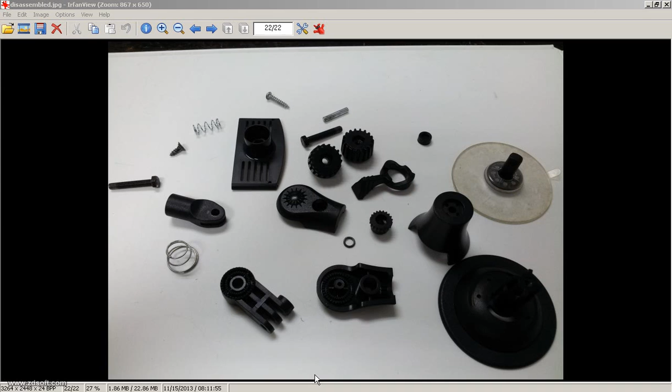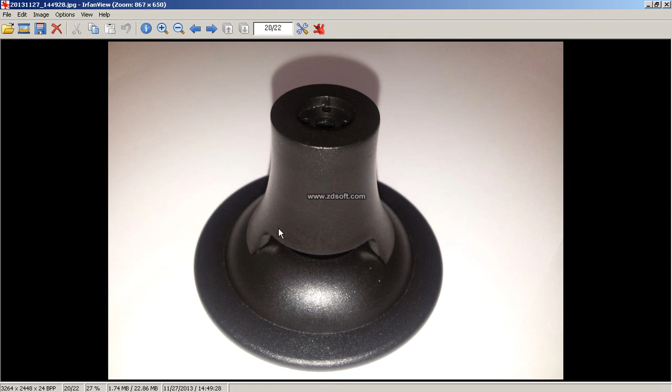Alhamdulillah, in this video we will continue our SolidWorks project on this glass suction cup mount holder. I would like to show you another component, which we can call a vertical casing. This vertical casing is mounted on this support structure here, as shown in this image. At the bottom we have our vertical support, and the upper part is our casing, the vertical casing.

In this video I would like to show you how I did this vertical casing in SolidWorks. So this is another view here, this is our vertical casing. This is another view to show you the bottom portion of our vertical casing.

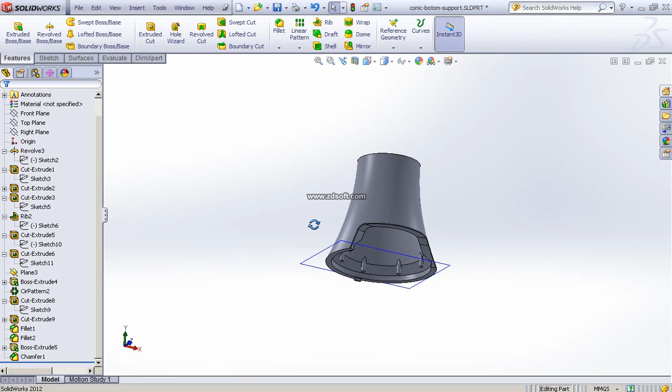Alright, okay, so in SolidWorks, for us to do this component, let me show you. So this is our vertical casing, which I have done. As you can see, the way I did this component, we have our features tab here, our feature manager. Let me drag until at the end, to our starting point.

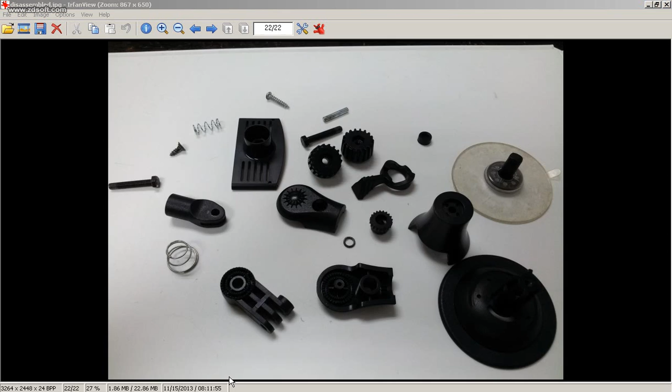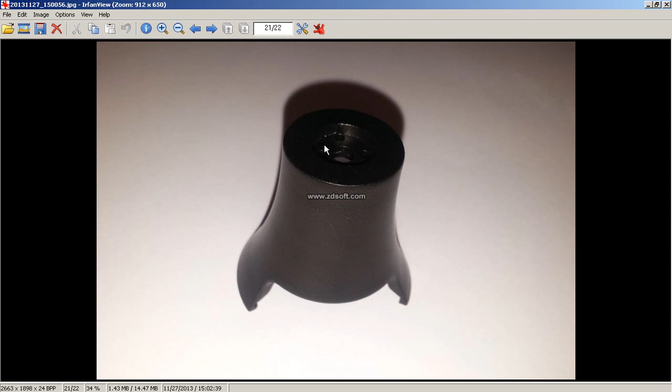Firstly, what I did is some revolve, as long as we know the cross section, as shown in this image. The cross section of this geometry - we have a cone, is a curvature, to form a kind of cylinder here, but we have a curvature. So I already measured the dimensions of the cross section: the diameter, the length, and the curvature.

As shown in this sketch, if I go to normal view, we have our cross section. The radius at the top part is radius 11, bottom diameter is about 39, okay, 39, and we have the radius 19.5.

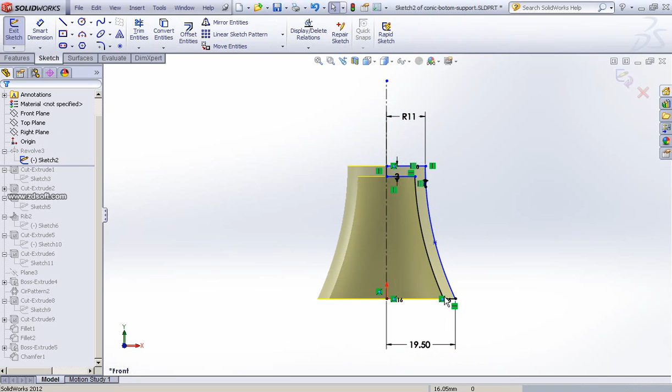I didn't use any shell command. After we have a solid, you can also use shell as long as you know the thickness, but I just revolve by making an offset of the curve, and the distance of this thickness is 3. Then I do some revolve into the center line.

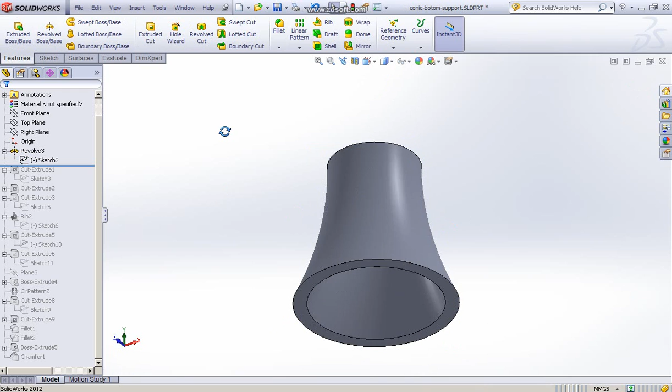So we have our basic shape for our casing. The next thing I do is cut extrude, since we have a cutout here for a certain depth. The sketch is sketch 3, and the depth of our extrude, if we zoom in, is about 2 millimeters.

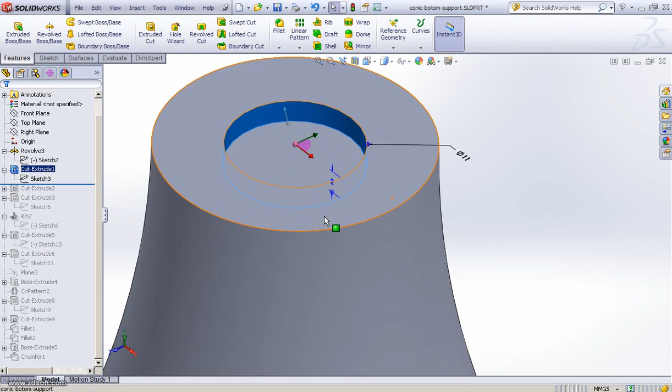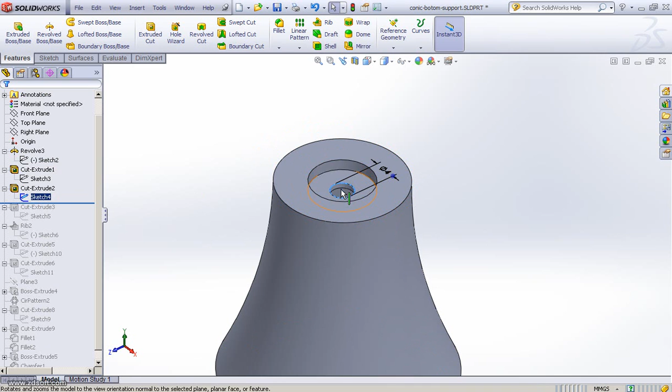Since in our component here we have a depth about 2 millimeters, then the next step is I use another cut extrude to form a hole here, diameter is 4, and a cut through hole. So we have a cut through hole, diameter 4.

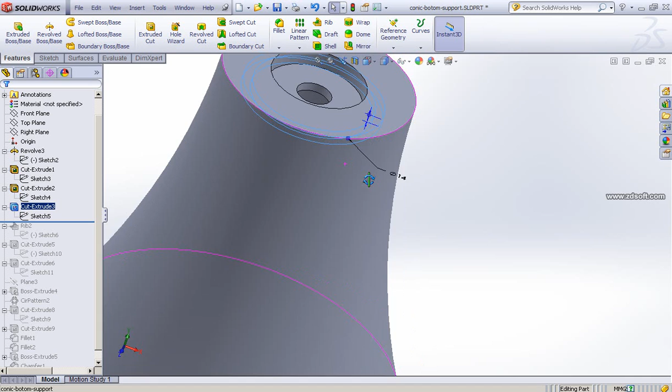Then I do another cut extrude. This cut extrude is actually in the inner part of it. So if you look from the bottom view, we have some cutout, some circle with an offset. I made a cutout.

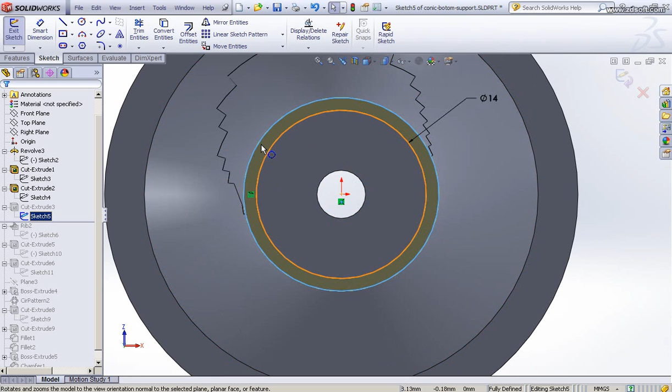So this is the geometry of this component. The sketch of this cutout has diameter 14, and if you go to the normal view, we have diameter 14, and our cross section is diameter 14, and with a certain thickness we have a cutout. We find some kind of a groove inside, the inner part of this casing.

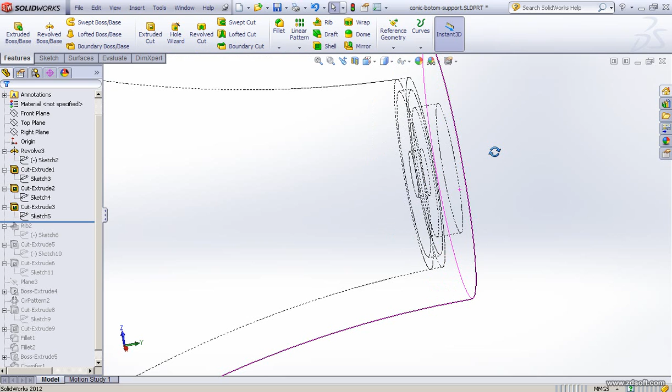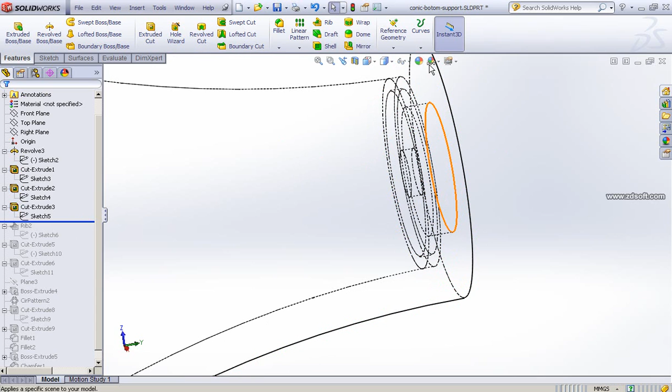To better view what the cut extrude does, let me make it into hidden line. So before cut extrude, we have a solid inside surface, we have a flat. Then after cut extrude, we have some cutout from here, some circular cutout, based on the diameter 14. Let me go back to shading mode, to shaded mode.

So then the next step is rib. The rib will be at that part, in this area. So the idea before this, we make a cutout for us to do some rib here. So we have a rib. The rib sketch is made with a single line here, with some trim.

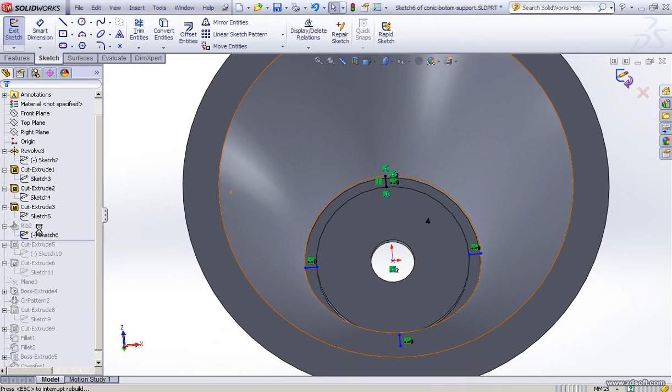We have 4 lines here, so we do a rib with a certain thickness. The thickness of the rib is 0.5. Make sure the direction of the rib is to the bottom if you look from this view.

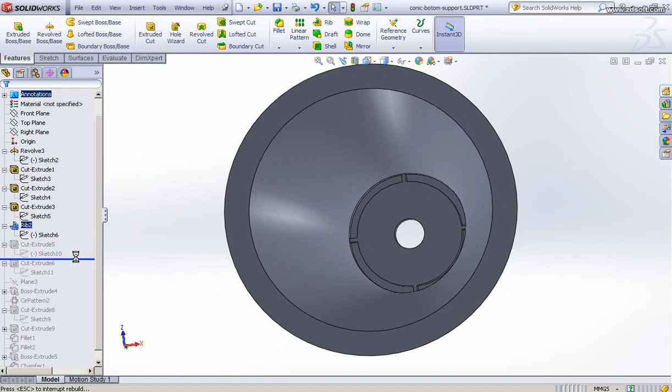Then make another cut extrude. If you look from this sketch, at this area, before we have the cut extrude, if you look from the bottom part, we have a flat surface here. When I do cut extrude, it's to make a cutout version, so we have a step here, another step, a cutout with a certain depth.

I copy the edges here as a convert to entities, as edges. Then after that, what I did is make a cut extrude with a height of 2 in that direction. So we have a kind of step here.

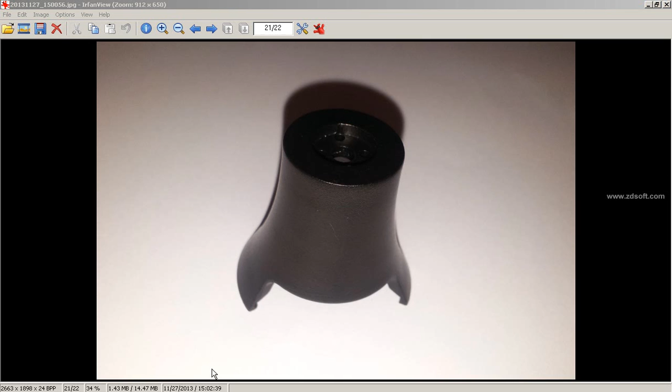We have kind of a step here, since in this picture, if you look at this, not this one, we have kind of a step here, with a distance of 2. Okay, then...

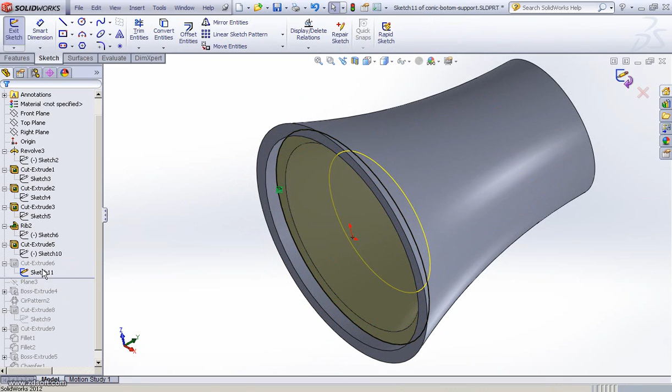The next step is I make another cut extrude. The idea of this cut extrude is to make a kind of chamfer here by this sketch. The sketch is I copy the edge of this surface by convert to entities, but when I do, we have another option when you do cut extrude. If you look at the cut extrude settings here, we have a parameter of 50 degrees.

I copy the edges to get a profile by using convert to entities at this plane. At this plane I made a cut extrude, but not using through all, using blind by a certain distance, 5. We have an option here: if I didn't click any option, we have a straight cut extrude, but if I put it 50 degrees, the direction of our cut extrude will be tapered by 50 degrees measured from our vertical axis. So we have 50 degrees.

Make sure that you click on draft and set it on. You have an option, draft outward. If you put draft outward, it will be increasing, bigger. Make sure it's not draft outward, so it will be decreasing, tapered inside, about 50 degrees. That's another way to use cut extrude. I didn't use chamfer; the suitable way is to use cut extrude for this case.

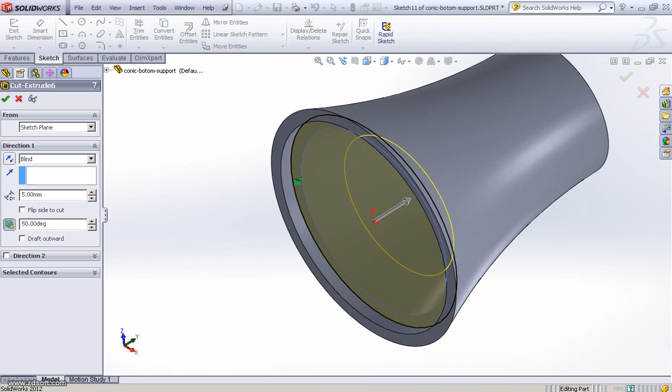Then we have another thing. The idea to make it tapered here for 50 degrees is that when you look at this image, previously we have a step here, then a surface which has been tapered, shown in brown. I measured approximately 50 degrees, so it will be kind of tapered here at 50 degrees.

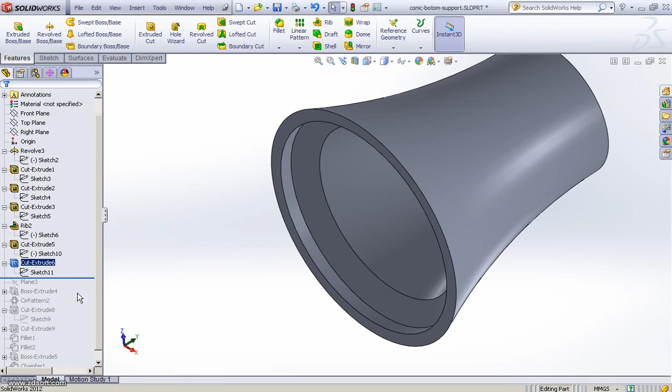Right, then I go to plane. The plane here, I make by using a reference plane. I think you guys know how to set this plane. The plane is referenced from the bottom surface here, and we put a certain distance.

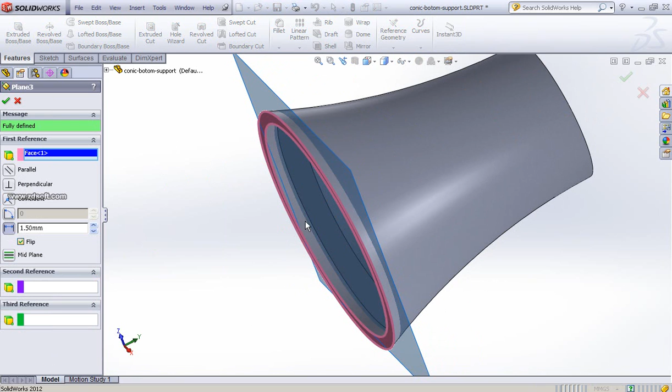If you look at the setting of the plane: the face one, the bottom one, is our bottom surface, so we have a distance of 1.5 here. Make sure the flip direction is toward that direction. Our reference is this bottom surface by using a reference plane, with 1.5 millimeters in this direction. Make sure I click flip, so we make a new plane there.

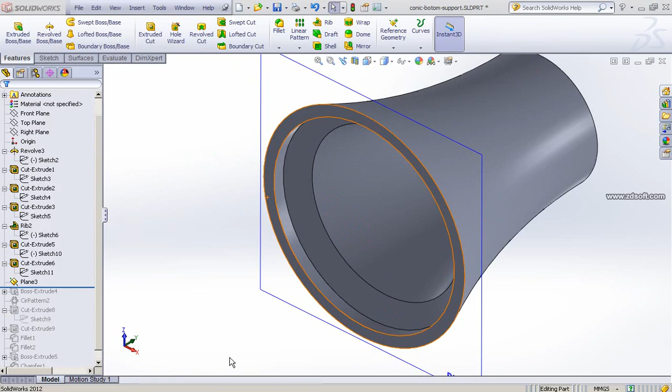Plane 3, so the plane is for me to do this. If you look at this picture, we have a kind of what we call a cylinder key, a cylinder which has been merged from the surface. We have a cylinder here starting at the top face of this tiny cylinder, which is where we put our plane. Then we do a circular pattern, then extrude directed to this conic casing. So that's why we build this plane.

After we have this plane, then we make a boss extrude.

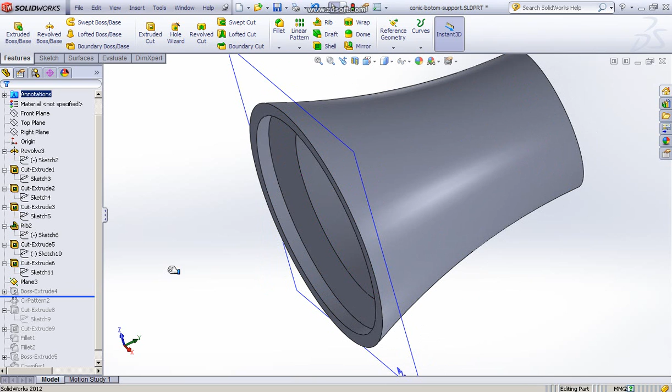Initially I have one cylinder here. The sketch plane will be the cylinder, the circle here. This circle is on plane 3, and on this plane the diameter is 1.5. Then we extrude toward the surface.

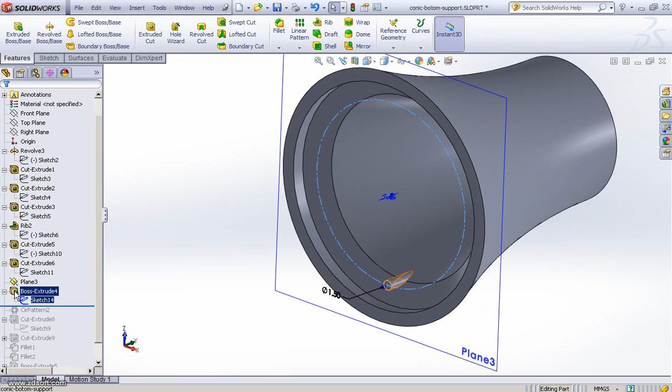So when I do the settings for extrude up to the surface, you select the inner surface, so it will be extrude to the surface.

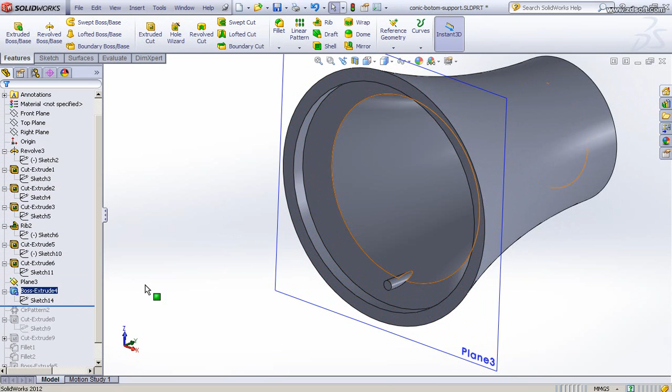Then after we do this boss extrude, we make a circular pattern, using the inner or outer surface of this cylinder.

So our circular pattern setting total is 7. The features to pattern is our original, this tiny cylinder here, our boss extrude 4, and our edges here.

Edges here, you can use these edges or you can use surface. We have the edges, this edge, and 7 is the number of our pattern, and make sure you check equal spacing, so it will equal space around this circular pattern.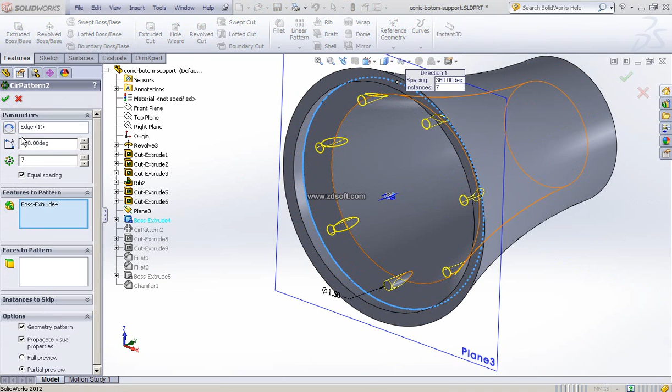So then we have this, we have 7 of it. We have 7 cylinders.

All right, so the next move is that we will make a cutout here. If you look from this image, we have a cutout. Actually this cutout, if you look at this component in detail, is not a straight section. It's kind of a circular cutout with a certain radius, a big radius of circle.

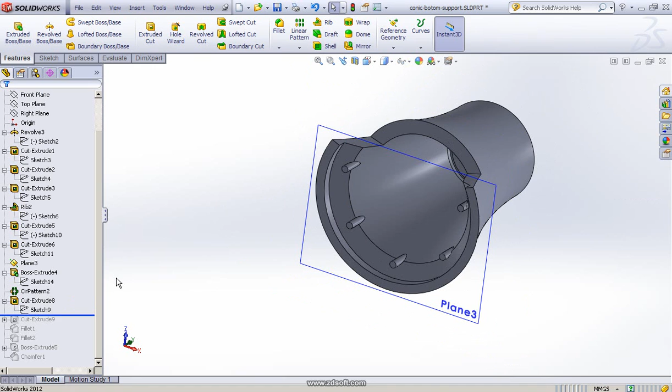Then we make a cut extrude here to cut out this part. So what I did is, if I zoom out a little bit, after that I do a cut extrude. If you look on the sketch, if I edit the sketch, we have a sketch there.

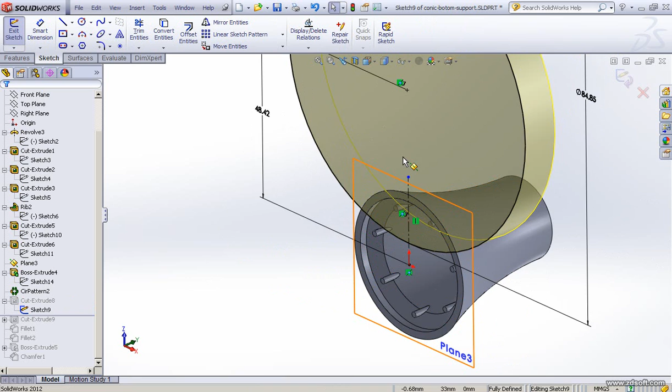The plane where I did this circle is on the bottom surface. I make a sketch plane there. The radius is approximately 48.42, and the height is roughly set to get the basic shape for cutting this portion, this area to be cut out.

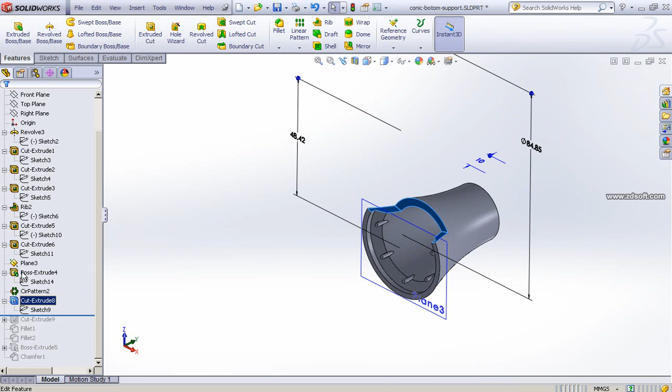So we don't use a sketch for the distance; the cut extrude setting we don't use with a certain distance, it's about 10 millimeter, the thickness of our cut extrude direction, because the distance here of the height of this cutout is about 10 millimeter.

So this casing will be cut out to get this kind of shape.

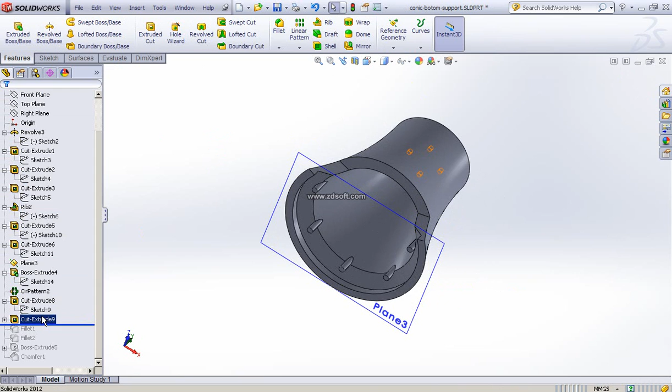So the next one will be another cut extrude. Another cut extrude we have at the bottom part here. The bottom part has tiny holes here.

This tiny hole is for that kind of knob here that will be mounted here, a knob which has a 4 key slot, cylindrical key, to be fit into these 4 holes.

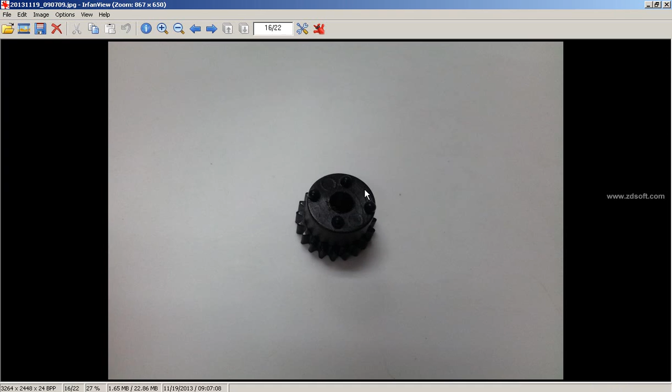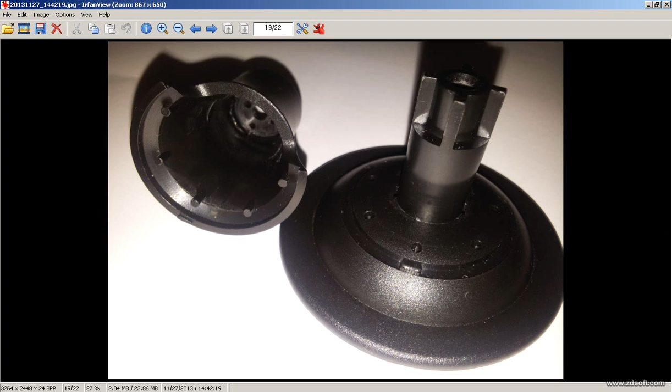Let me show you the image of that component. So the image will be this one. This component is on the bottom surface of it. This component, kind of gear, will be fit into and attached to this part.

If you look at the image there, we have 4 kind of keys, cylindrical keys, that will be fit into this. So as long as we know the dimension, the diameter of the pin, the cylindrical key is 1, so we have cylindrical holes here. The plane of my extrude is on this plane, so I make a cut extrude there, making a sketch of the circular to do our circular holes, diameter 1.

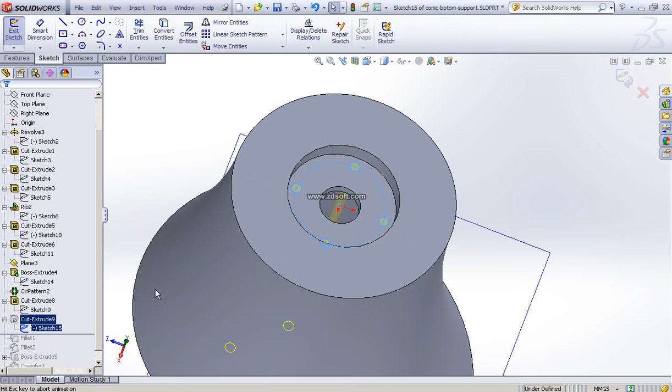If I do edit sketch, I go to normal view. So we have our sketch here, diameter 1, the pitch circle diameter, make sure you know the pitch circle diameter, the 9 diameter. So you make an array, circular pattern array, to get these 4 holes there.

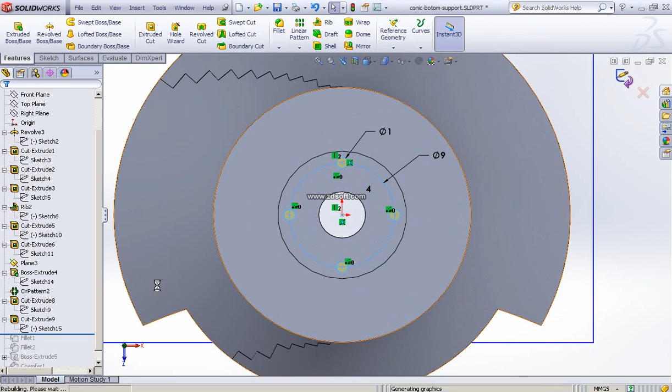Then what I did is I make a cut extrude. The direction is downward, our cut extrude, make sure it's through all, so we have holes. Then we have these 4 holes.

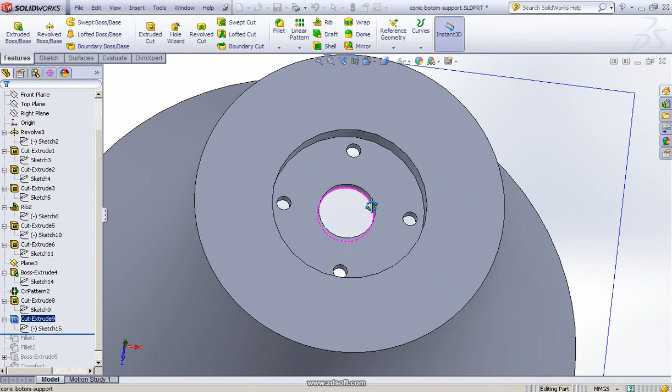Then what I did is we do some detailing, so we do some fillet. I did some fillet here. Since we know this corner is a sharp corner, I did some fillet on that area with a certain radius, about two edges, each 1, and this edge we have 2.

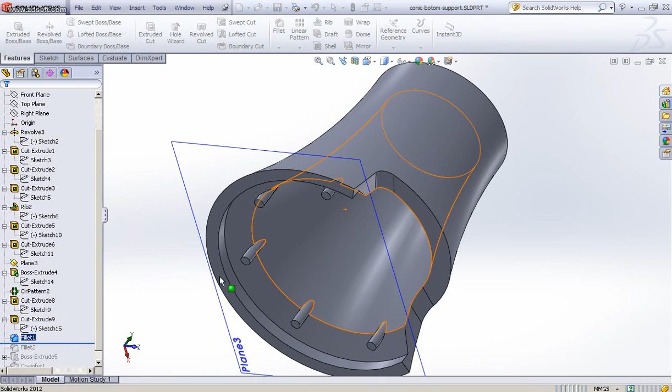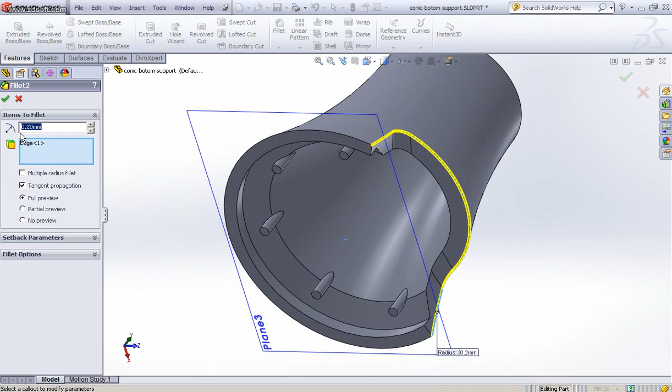Then another fillet, we have a small fillet here on these edges. This one I use FilletXpert, where you select certain edges and it gives you the radius, a tiny radius, about 0.2, on edge 1. So we don't have sharp edges.

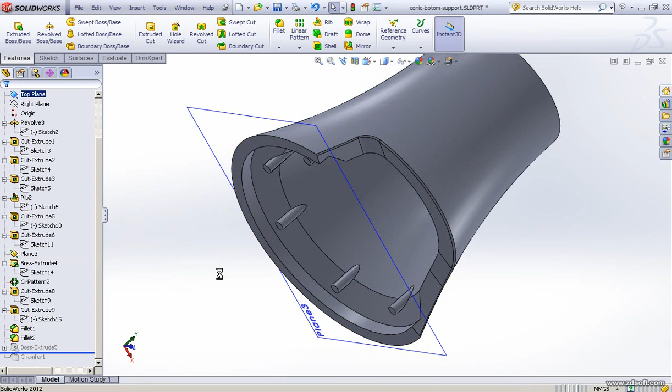Then after that I did another boss extrude. Before this boss extrude, if you look closely, we don't have a kind of key here. When I do boss extrude, we get a key popping up, based on this sketch, just a rectangle, on this plane with a certain profile. If you look at the sketch, the key is not actually a rectangle shape.

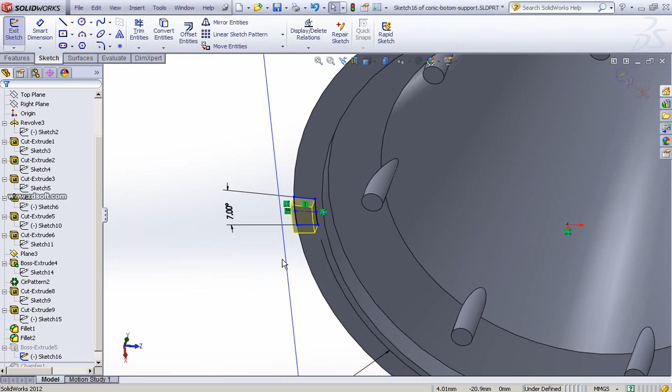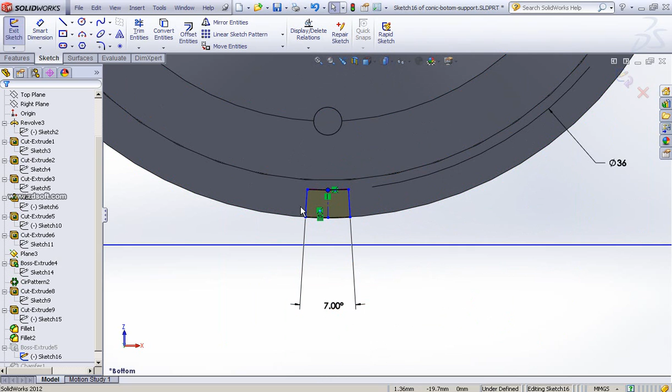The key is actually a trimmed version of our circular shape. If I zoom in normal, we have a key at the bottom here. Actually this key is part of our full circle on this plane, which has 7 degrees from the center point of this big circle. So we have a circle here with the outer radius being the radius of this conic object. So we make a trim until we have this portion, this sketch, this profile, then we make extrude.

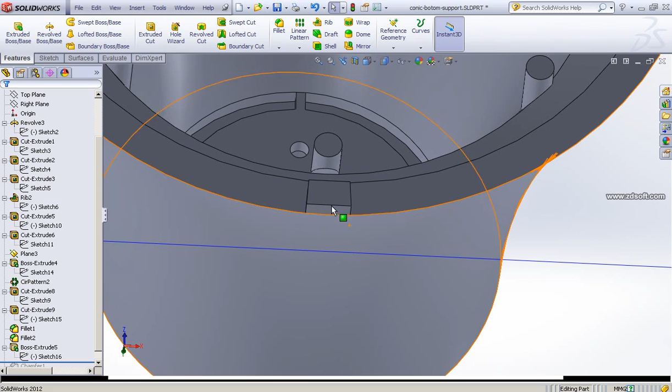So this is a key, but I made it not exactly as shown in this image, a little bit different with different dimensions. The idea of the key is to lock the position of this vertical casing so it will not slide circularly on this curvature surface.

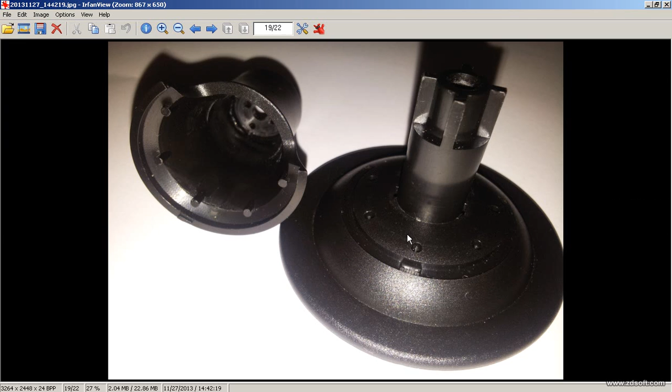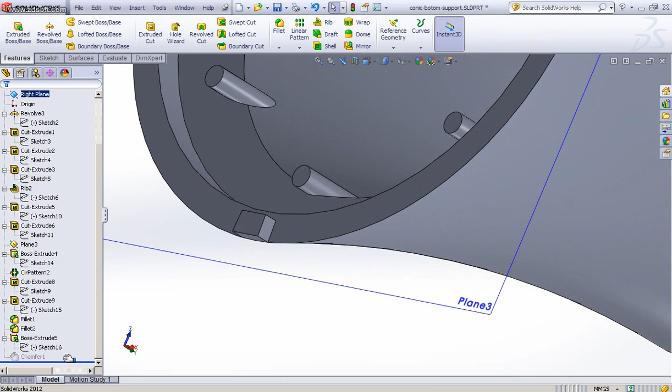So I think the last one, I did some chamfering. Since the key shape is not totally flush at these edges, we need to do some chamfering there. Before chamfer, then we put chamfer with a certain distance, so we have our key. So then we finish.

So that's how I did this vertical casing component. It's a quick one to show you, I did it step by step. Inshallah, I think you guys can use this video as your reference. Maybe you have a different kind of component, but this video will at least help show the approach we do things in SolidWorks to finish our part. Okay, Alhamdulillah.